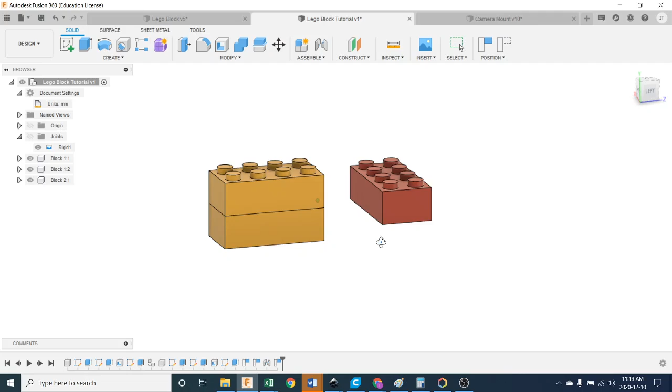So we designed these Lego blocks in front of us. I'm just going to turn off these two by hitting the eyeballs, and look at this one. What would be the best way to position this for 3D printing? Let's look at it like this.

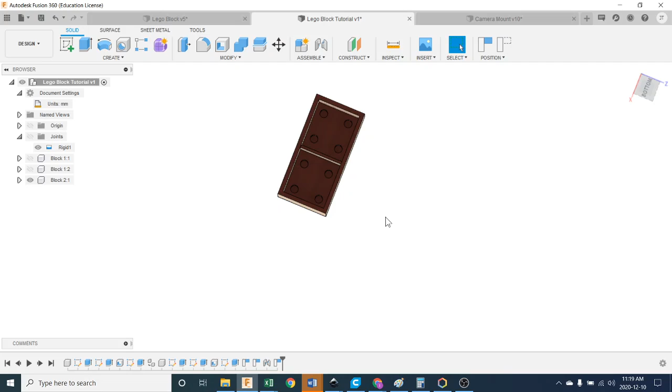What if I positioned it in this orientation? I didn't think that was best, because as it prints up layer by layer, it's going to end up with trouble as it goes up, since it's got nothing to build on when it gets to a certain height to build this portion here. It's not bad, but it would have to put supports in to build that, and then supports again to build this.

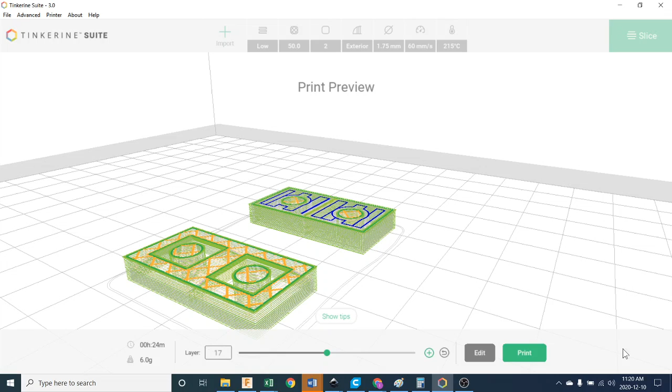And the supports are a bit of our enemy, because as much as they work - let's have a look here. I've loaded in two Lego blocks. Let's go back to edit so you can see them. I'm going to slice this up. Oh, and the two Lego blocks have different bottoms - we'll talk about that in a second.

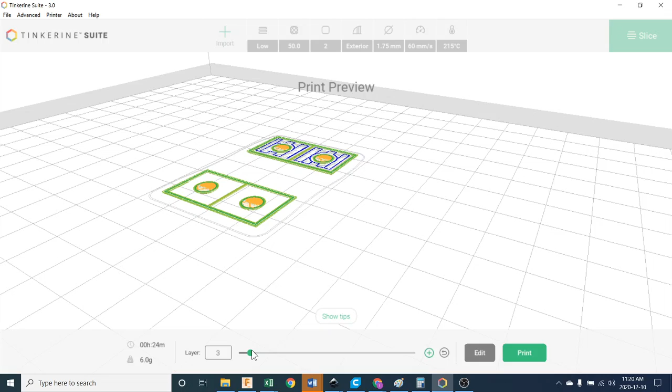I'm going to slice this and let it figure it out. Here we go, there we are. I'm going to run back the layers, and you can see this one in the foreground is not building supports, while the one in the background is building supports. That's great, except they're really hard to remove and hard to get a clean surface.

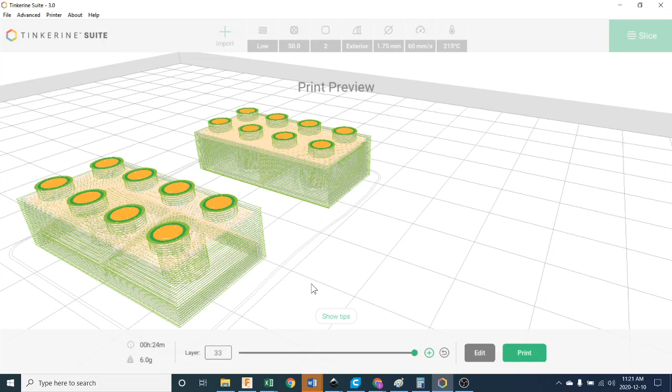So if we can design in such a way like this one so that we don't have supports, it's going to be a far better print in the end. It'll save time and save plastic. I've finished that, and I'm going to show you what I did to make that possible. Not the best view here, but I'll show you in CAD.

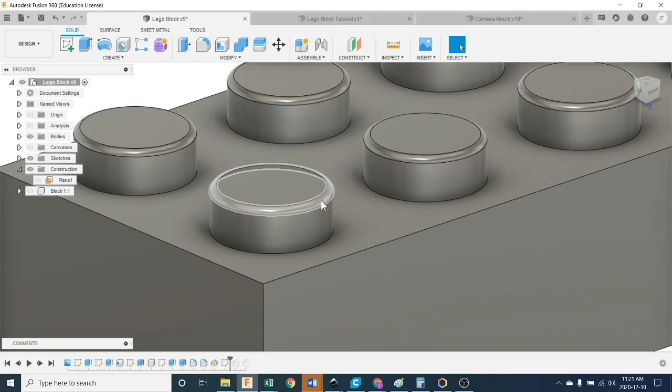It's better if we can consider the 3D printer as we're designing. So let's jump over to one that I've already done. It looks the same like this, but what did I do? Well, one modification I made was I radiused these edges - the sharp edges were hard to put together when you tried to mate them with the other blocks, so I radiused those. Another thing I did, if we look underneath, was add these inner tubes.

Now, believe it or not, these came later. I actually looked this up, because that's just the strange person that I am. From the Lego site, it says the inner tubes came along at a later date - they were an addition by the son of the inventor of the Lego block, and they provide for a higher clutch power. That's how much effort it takes to pull the blocks apart.

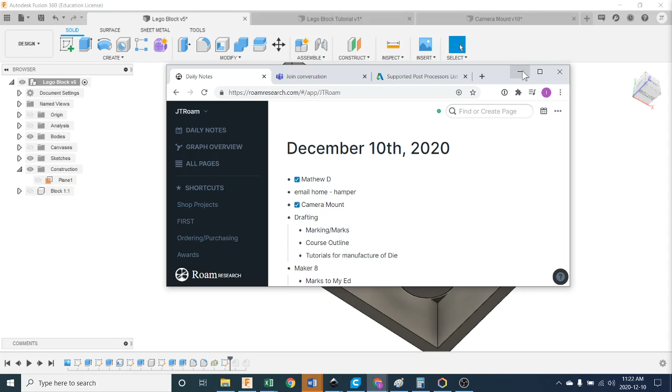So we are going to add those now that we know that, because it's going to help with our design. Let me get rid of that - and that's these tubes, so I'm going to add those. But what else did I add in here? Well, can't really see in this one, I'll show you as I go - I turned them off here, that's why. Boom, boom, there we go.

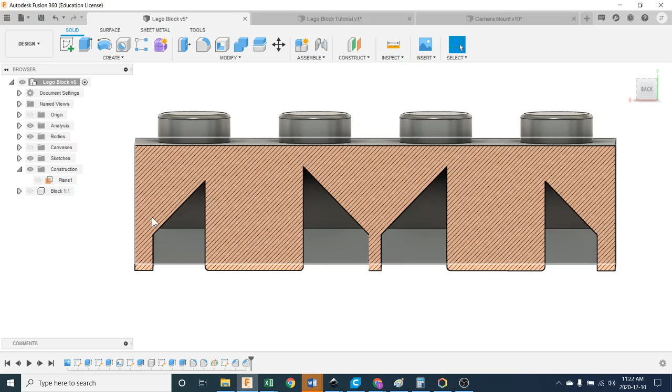I decided that if I put a slope in here like this - and maybe I'll turn on an analysis, you can see - if I slope this surface, then I don't need supports, because as the 3D printer moves up, building from this being the bottom to this being the top, it will build on the previous layer as long as it can. So this angle I've provided will allow for that, meaning I don't need supports if I design it this way. Turn off the analysis, and you can see it just provides.

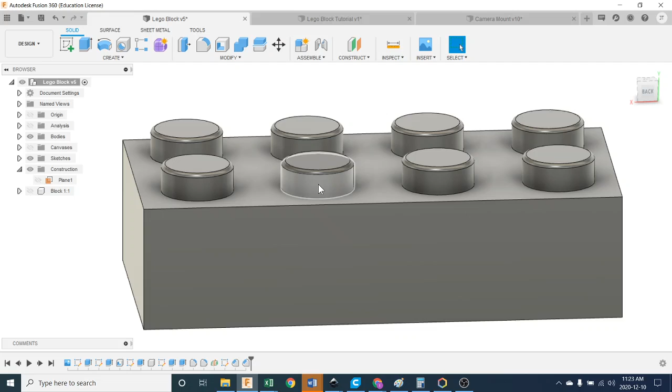Now, the only thing I had to worry about was whether there's enough stud here to still stick into the other Lego block. And there is, because these are only 1.3 millimeters high, and this space is much more than that, so it won't interfere at all.

So how did I do this? Let's go back to the other Lego block and modify this one from the previous tutorial. The first thing I did was fill these in, recognizing they came from the shelling process and it would be better if they were filled.

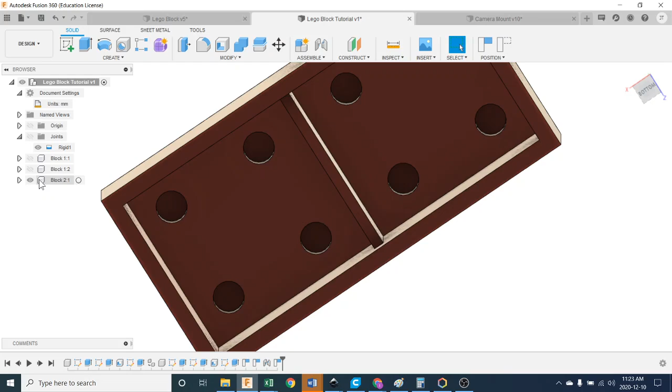So I'm going to activate this block to draw on it, then push E on my keyboard. It says things have moved, capture position, yes. I'll look at it straight on by clicking my view cube, and now pick this surface, that one, that one, that one, that one, that one, and we are going to extrude them up.

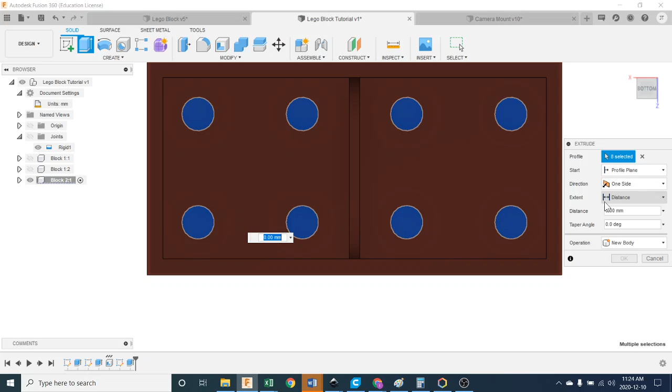If I rotate, I can see my extrude here, and we are joining. That's good. I'm going to extrude them to the object, so I don't have to know how far up—just extrude them to this surface. Now they've extruded up to that and it looks absolutely filled in.

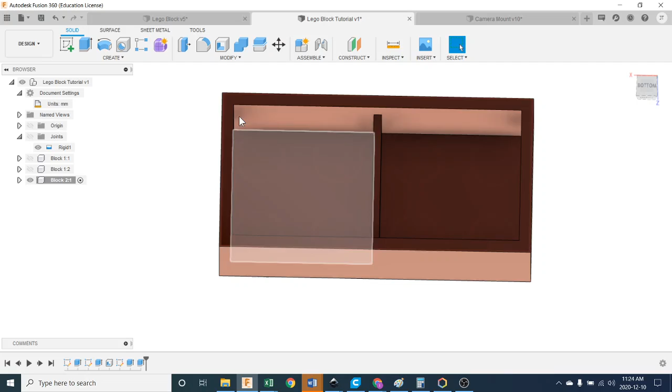Perfect. Now it's time for tubes. I'm going to draw on this surface some tubes. So create a sketch, pick the surface. I am now sketching on this surface.

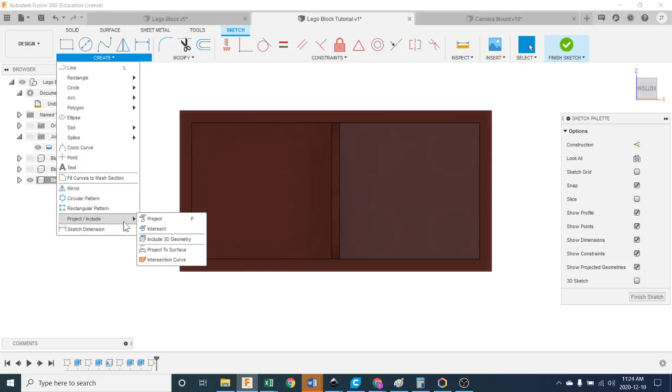Now I would like to use these studs here as reference while I draw these tubes. So how do I do that? I don't see them—they're not part of my sketch plane or my sketch paper. So I'm going to do something called create and project, or include. This projection is what I want right here. I click it and then choose things I would like to project.

I'm going to choose the top of all of these little studs—boom, boom, boom—and push OK. When you push project, this little menu comes up, and you push OK. When you head back to your sketch, you can see they're part of your sketch, or at least your sketch can use them, and that's what we're going to do.

So then I had to come up with a way to draw a circle that touched each one of these studs, because that was my tube that I'm going to make. So this is what I decided to do: I created a line, and I went from the center of this one to the center of that one, then pushed enter—I'm done making lines, or push escape, I guess.

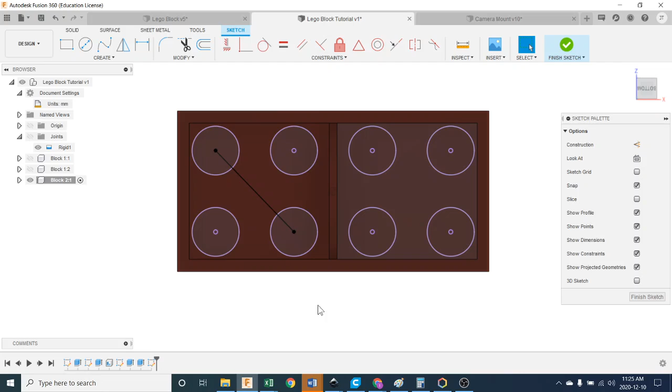Now I'm going to make another line, going from the center of this to the center of this, then push escape to stop making lines. I'm going to turn both of these, holding shift while I click two things—I've selected them both—into construction lines, using X on my keyboard as a shortcut, or hotkey.

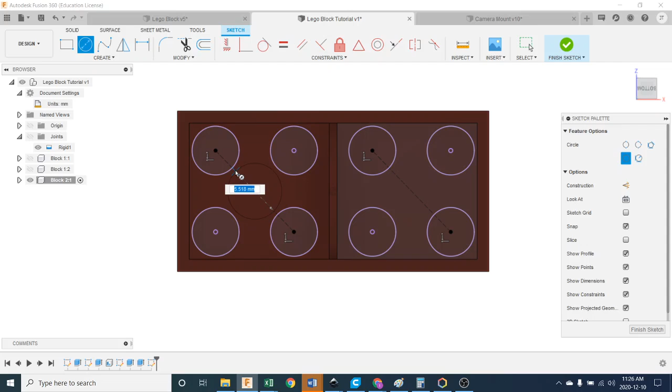Now I need to draw a circle, and the circle is going to have a center and a diameter. The center is going to be the center of this line—there's my triangle, it tells me I'm on center. Then I slide out and look, it says I found the intersection of the circle there. So, boom—and I'll do it over here.

There we go. Now, the tubes traditionally are hollow because it saves material, but hollow is unnecessary for us because it creates another issue with 3D printing. Actually, we could fix it—that's tempting. No, I'm just going to leave it for now. I'm just going to make mine solid; they're so small, we're just going to make them solid.

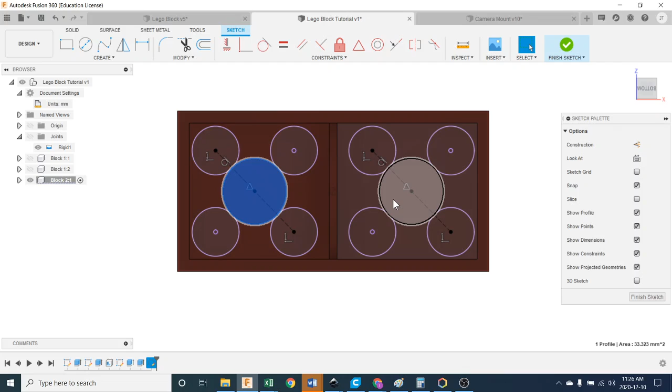So we're going to pick that one and pick this one by holding shift to pick multiple things, then E for extrude, and extrude them up. Grab this little handle—how far should they go? Make sure we're joining instead of other options. We're joining. I'm going to bring them up to the object, picking this surface as my height. There, push OK. Now the other thing we found out was this here becomes a problem.

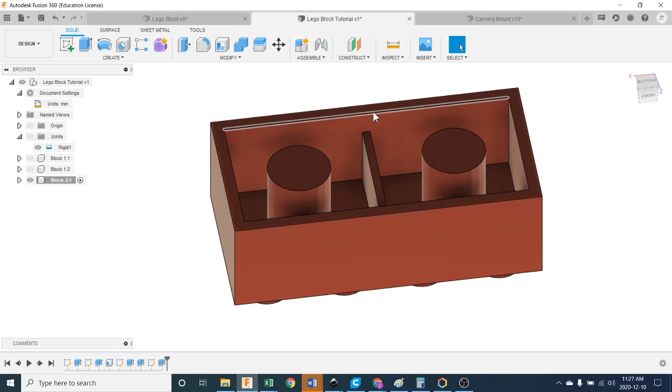For 3D printing consideration, instead of having it low and needing supports, why don't we bring it right up flush? How should I do that? The easiest way is to go back and click on it, and it will show you in your history how you built that. There's my extrude, highlighted with these hash marks. If I double click it... hang on, I gotta find it, I had to push my doghouse to find it again, it went off screen. So I'm going to bring it up, not to distance, but to object.

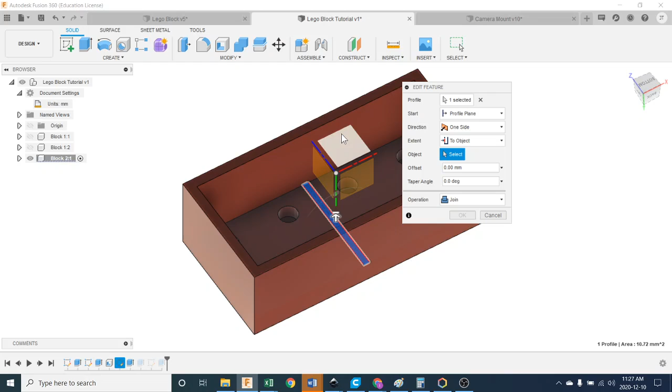I'm going to bring it up flush. Now that doesn't need supports. Well, there we go, off screen again for some reason. There, okay, so now what?

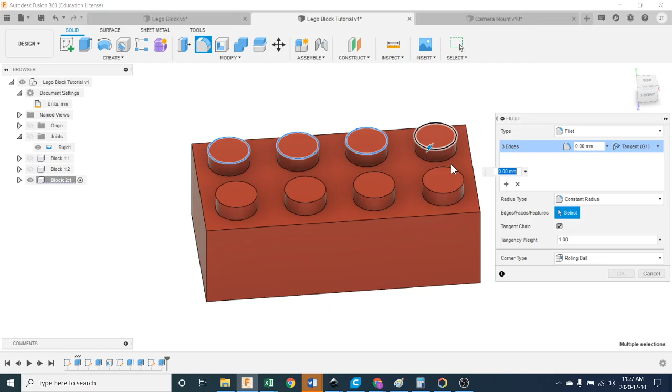How do I put in these 45-degree things I was talking about? Or maybe I should do the radiuses, to make them smoother. So I'm going to head up here to this tool called Fillet. I'm going to pick all of these edges like this, run around, pick the edges, and then we're going to radius them.

Now I'm going to use the arrow to start figuring out how much radius I need. I'm just going to pull it and decide how much. Maybe that much, 0.5 millimeters. Push OK.

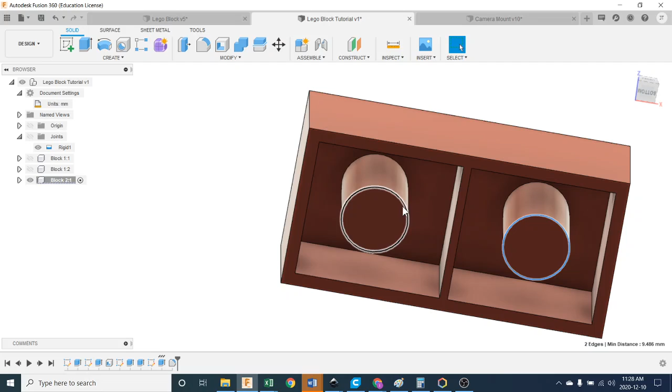Then the next thing I'm going to do is fix these, because if they're sharp, the first layer of the 3D print causes this to get smushed, and there's a little ridge here. So I'm going to radius those, but in this case I'm going to chamfer them, which is putting a straight edge on the edge. I'll give that a little push. Now you decide how much chamfer you need, but I'm just going to go a little less than that. There we go, push OK.

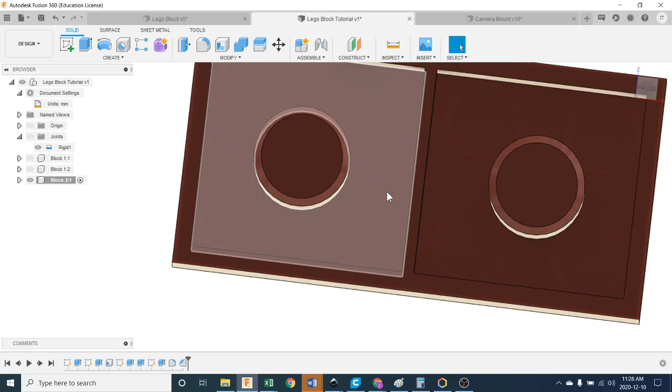Now the last thing is I have to deal with the fact that these surfaces would need support, and I don't want them to. So I'm going to go back up to that chamfer tool. Where is it? There it is. I'm going to pick this, that. Oh, did I get it? No, I only have 2 selected, so I didn't. So I'll click it, and we'll click it.

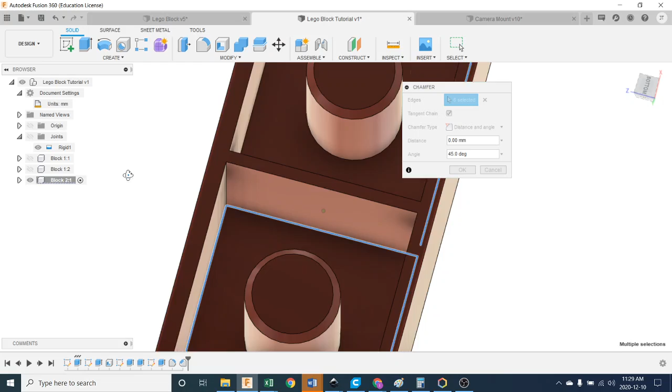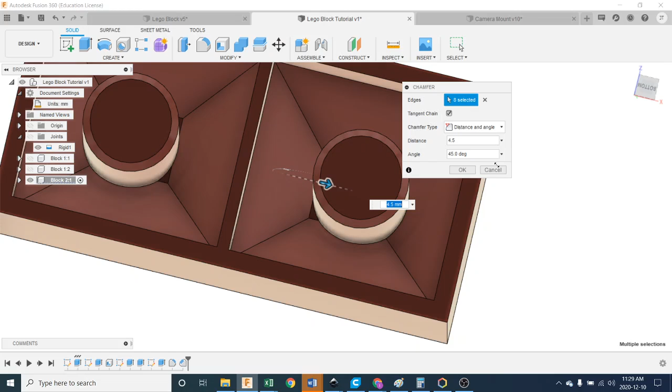So I got 4. Now I'm going to go pick this one, this one, and that one, and now I should be able to bring this like this, and you can see I'm starting to create that 45-degree shape that I want. I found that about 4.5 millimeters is what we look for. Now yes, there's a little bit of non-chamfered in here, but the 3D printer should easily bridge across that, it's so small. The reason for that is I'm not actually drawing from the center line here, I'm actually drawing from... anyway, there's a reason. So we are good, we'll push OK.

And now we've got this block. If you wondered how I looked at it in a section view, I'll show you how to do that. You pick Inspect, it's just a way of looking at things, so it's an inspection. And now we're going to use section analysis, which sounds fancy.

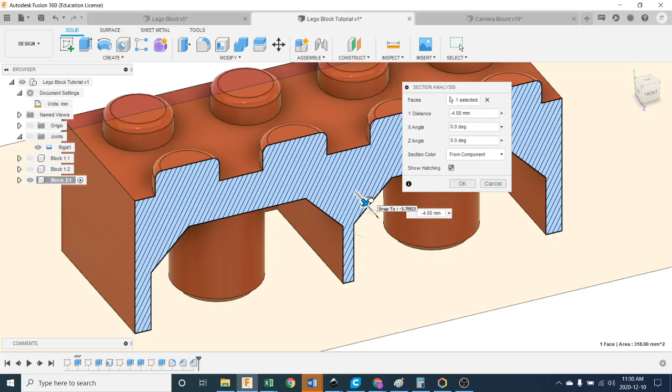Click it, pick a surface, and then you see the arrow. You can just draw back. I went back half the block, which was 4, or -4 I guess it is up there. Boom, like that, and then you can see half the block. So that's what we're looking at, just like I had it. If you ever want to look at it normal again, just push your analysis over here and switch it off, the eyeball. There we go, so it's just a way of looking at it. It didn't change the part at all.

That part should print perfectly without need for supports if I print it in this orientation. There we go, that orientation right there.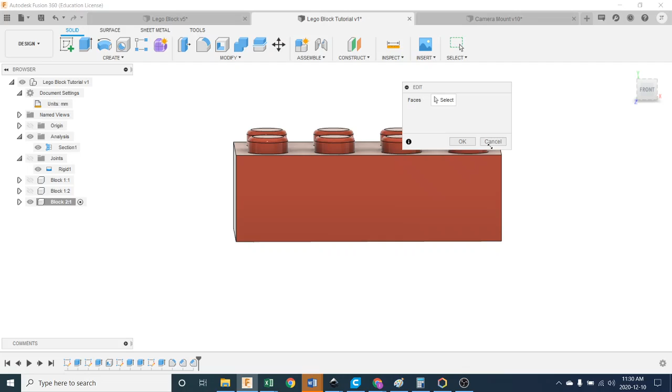Okay, so that's design modifications for 3D printing. When you're designing things, you always want to think how they're going to be built, and can I make it easier for the builder? In this case it's our 3D printer, and we've made it not only easier, but it's also going to produce a better part for us. You could slice that in your 3D printer and test it out and see how it works. Do the blocks fit together? That's it.